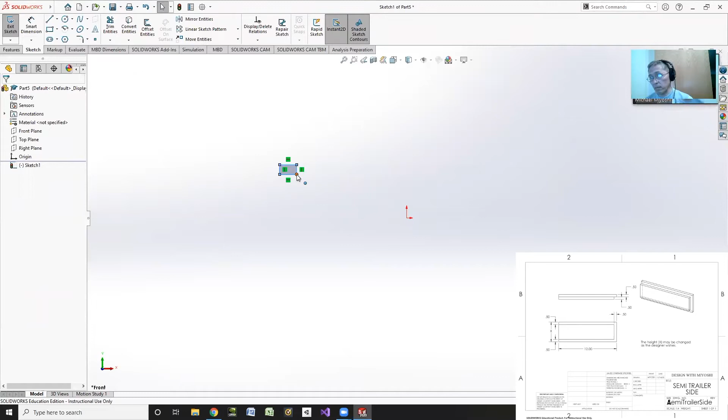I'll make a rectangle. Oops, I just made a rectangle real quick. That's okay, get out of the rectangle by clicking the check mark there. I'll just grab the corner and pull it down below the origin. Then I'll make a center line. Make sure the quick snap is hit there, add relation, hit the origin, do midpoint, and then I'll dimension.

I'm going to make my height to be 4 inches, and when I dimension it, I'm going to change this to be X so that people can make the height whatever height they want. But I'll make this guy 12, just like the rest of this guy is.

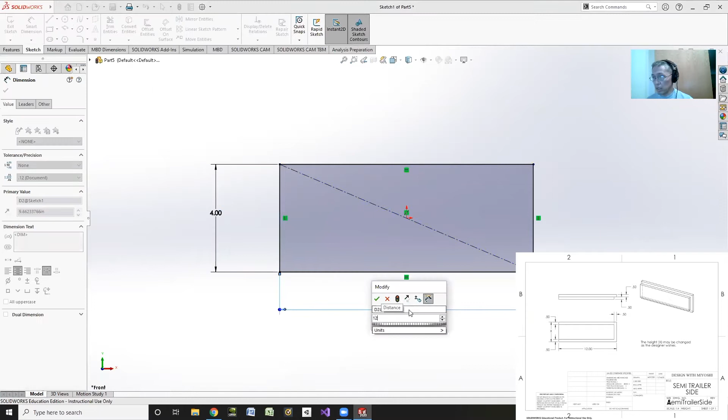Then I'll go to Features, Extrude Boss Base. We're going to go ahead and extrude this guy 1 inch, and then hit OK. Actually, let's just do this a slightly different way. No, I'll just do it this way. No, let's do it a different way. So instead of doing an inch, let's do half an inch.

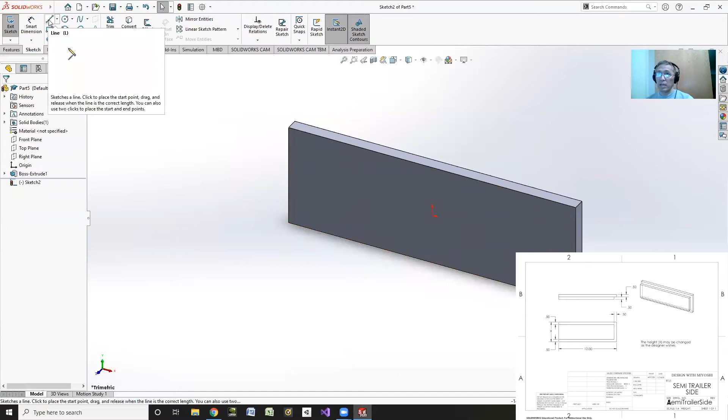Now, I'm not really one to like to put sketches on faces, but let's do that this time. So I'll do sketch, and I'm going to put it on this face this time. Now I'm going to make a rectangle again, here. And then I'll go ahead and add some relations here.

I'm going to make this line, oops, too many lines, so clear selection. We have this line and this edge, and we're going to make them collinear. Then I'm just going to do smart dimension for the rest. So here to here, I want that to be half inch. And from here to here, I want that to be half inch. And from here to here, I want that to be half inch as well.

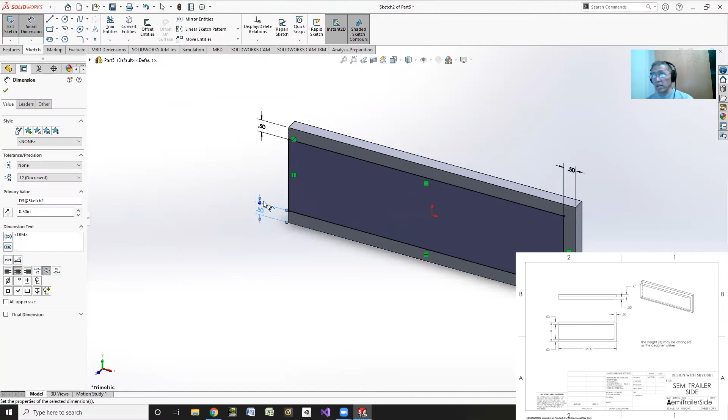Then I'm just going to extrude. So I'll go Features, Extrude, and I'll just extrude that half inch again, and hit OK. And there it is. There's my side. Don't have to do anything else, just make that side just like that.

Let's save. This is semi trailer, and this is side. Save. Don't have to put any holes or anything like that. And then I'll just do File, make drawing from part.

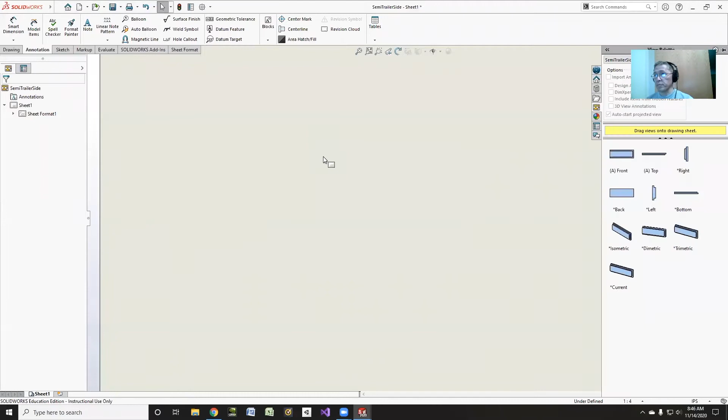There we go, it's landscape. And then again, I'll just do drawing, model view, next. I do want multiple views: front, top, and side. I'll leave it, probably not the side, let's do front, top. And just like that would be good. Hidden lines, sheet scale, okay.

There you have it. I'll just do annotation, model items, and entire view, or all views. All right, so bring that out so it's not quite as messy there. We'll grab that endpoint, bring that out there. Make sure there's gaps there, that's good.

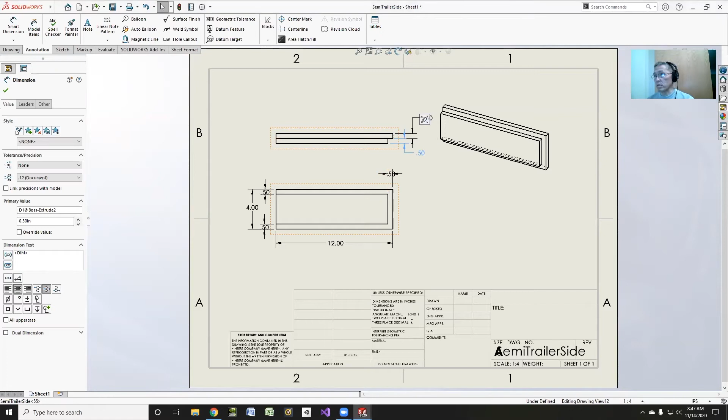Let's pull the 0.5 outside. There we go, and we'll pull this 0.5 outside too. Pull that 0.5 out as well. Maybe make it a little bit lower so it's readable. We'll bring that outside, make it readable. The 12 is good, the 0.5.

Those are fine, but I'll pull the 0.5, move it outside so I can read a little better. And pull the 0.5 outside so we can read better. There we go. And that's all the dimensions we need.

However, just before, I'm going to change this. I want people to be able to put whatever they want in there. So let's go ahead and we'll just put an X there. I'll say yes, that's fine. And we'll make a little note. So just put a note right here, that's fine.

Height. Change. Designer. There we go, there's my little note. Okay, and then I will go ahead and that's it.

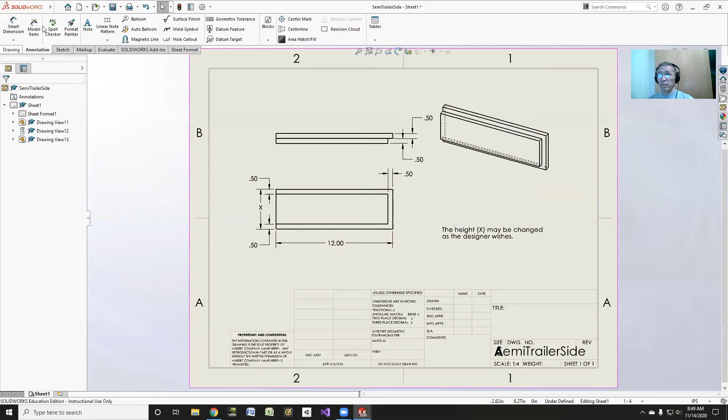So I'll right click sheet format, edit sheet format, zoom in a little bit. My name, when I see the A, double click, all caps. Last name, I normally want that last name, first initial last name. Double click on the date, open the date, and I'll find the A over here, double click.

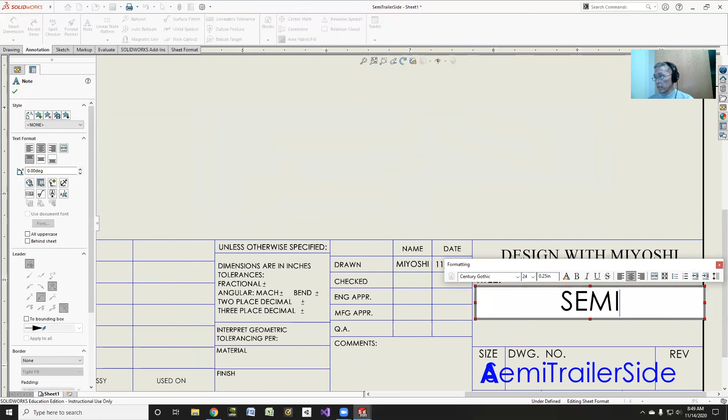We'll make that 14 so it fits in there. Double click on the title, it's going to be semi-trailer side. There we go, okay, quit sheet format. Go to sheet, and I'll zoom out even though I don't really need to.

Let's save, save all, that's a good name. And then do save as. There's PDF, there we have it.

The side of our trailer is all made and all happy. So thanks for tuning in. We'll see you next time on Design with Miyoshi.